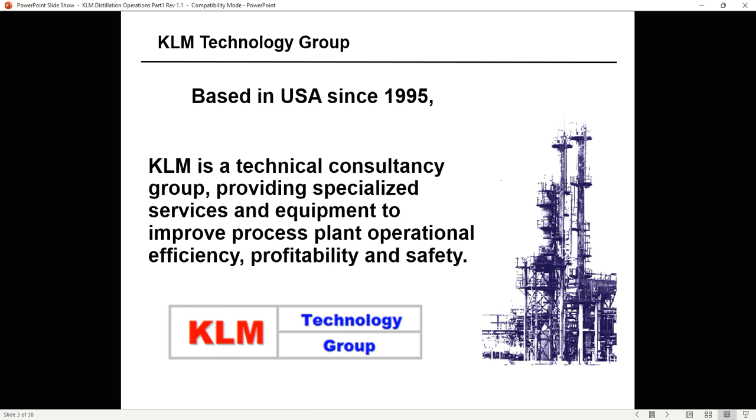Let me tell you a little bit about KLM Technology Group, based in the USA since 1995. KLM is a technical consultancy group providing specialized services and equipment to improve process plant operational efficiency, profitability, and safety.

KLM's core business is training. We do in-house training, regional conferences, and videos such as what we're doing today. We also provide engineering design guidelines, process engineering, optimization studies, energy studies, HAZOP facilitation, facility siting studies, and basic engineering with our key partners.

We do detailed design packages. We sell process equipment, random packing, structured packing. We have a great engineering magazine called Engineering Practice. We do unit commissioning and distillation equipment inspection.

It's very important for you to install the equipment correctly. We do unit benchmarking and evaluation of process units.

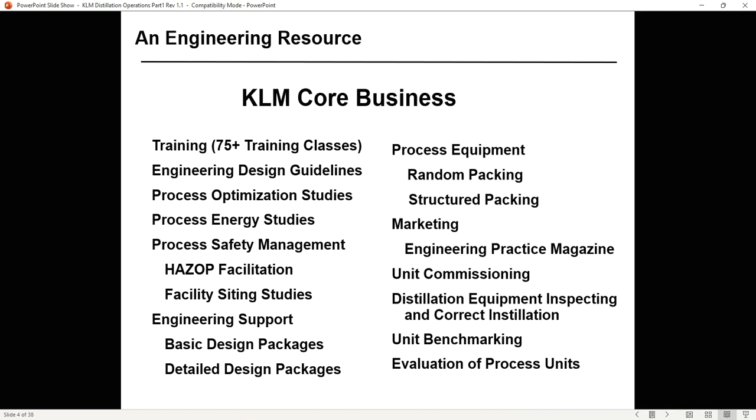Today we're discussing distillation for operations personnel. We also offer distillation design, operation, process control, and troubleshooting. For engineering and operations, we do advanced process simulation training, distillation for operations, which is what we're doing today, distillation commissioning, distillation process control, as well as other process unit and equipment groups.

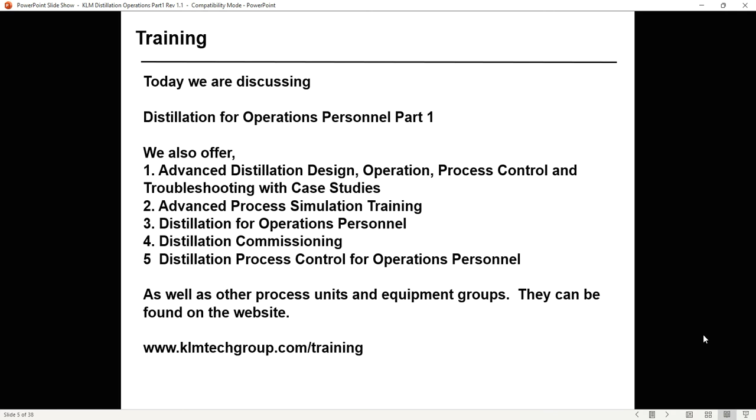We also do a whole group on ethylene, a large group on refining, and a large group on natural gas processing. These can be found on our website, klmtechgroup.com/training.

We have the Kolmetz Handbook of Process Equipment Design. In the Kolmetz Handbook, we have multiple chapters on distillation. We have distillation column sizing, 147 pages.

We have distillation tray hydraulics, which we'll talk about in part 2, 50 pages. Packing, reboiler design, process control, refinery crude towers, refinery vacuum towers, ethylene quench towers, BTX design, and 3 chapters on natural gas processing.

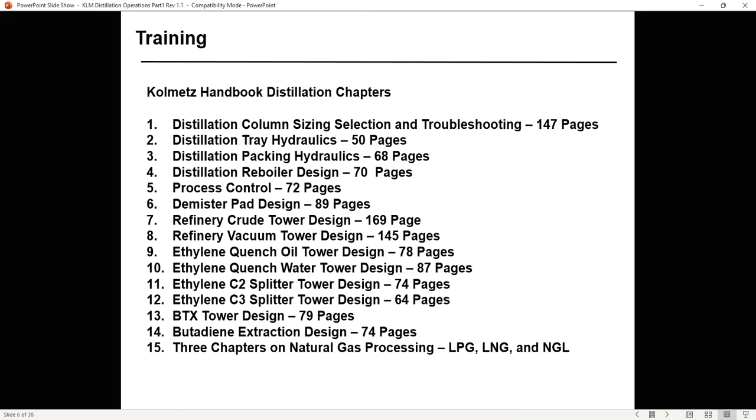There are multiple chapters on distillation in the Kolmetz Handbook. We have over 140 individual chapters on a wide range of subjects: pumps, compressors, control valves, relief valves. Each chapter is 80 to 120 pages, including design and sizing guidelines.

As we revise the chapters, we're adding troubleshooting sections. The handbook can be found here, klmtechgroup.com/Engineering-Design-Guidelines.htm.

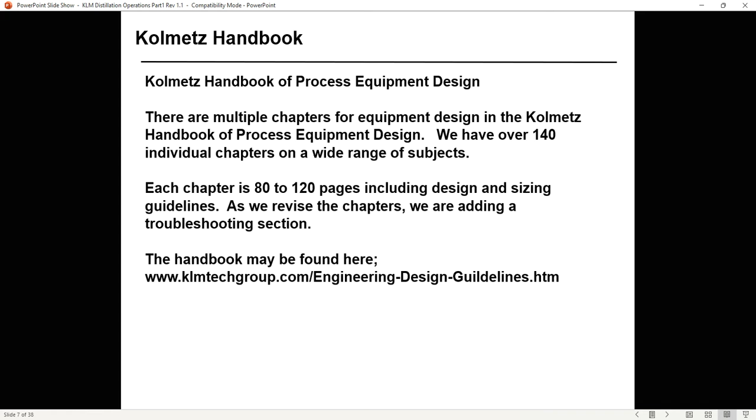Today we're discussing distillation for operations personnel. Part 1, which we're going to talk about today, is introduction, types of distillation, types of stages. Part 2 is types of trays, types of packing, and overview of hydraulics.

I think it's important for operations personnel to understand hydraulics. They need to understand flooding, weeping, and the internal flows inside a distillation column. I go a lot of places where they don't understand tower hydraulics.

They don't do the right process control. So it's important for operations personnel to understand how trays are designed, and then you can understand how to do proper process control.

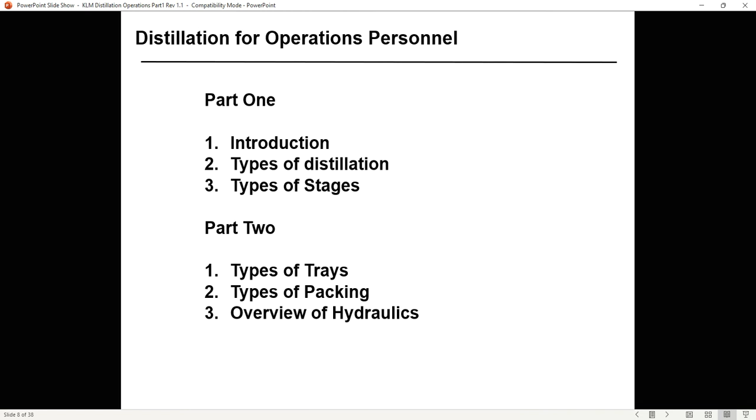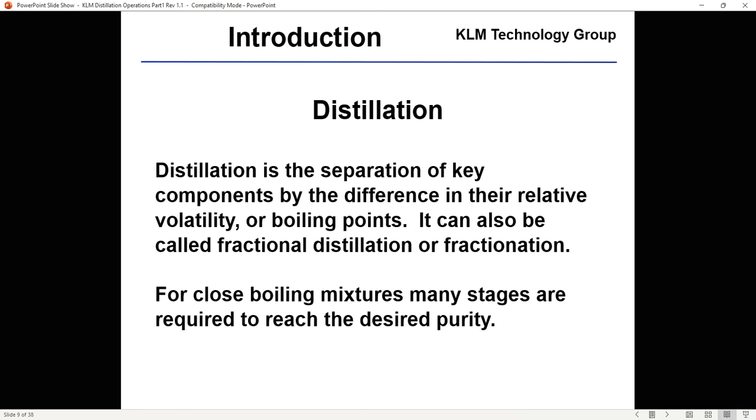Distillation is a separation of key components by the difference in the relative volatility or boiling points. So if their boiling points are close together, it's difficult to do by separation, by distillation. It can also be called fractional distillation or fractionation. For close boiling mixtures, many stages are required to reach the desired purity.

Distillation is favored over other separation techniques such as crystallization or membranes when the boiling points are far apart, when products are thermally stable, larger rates are desired, and no corrosion, precipitation, or explosion issues are present.

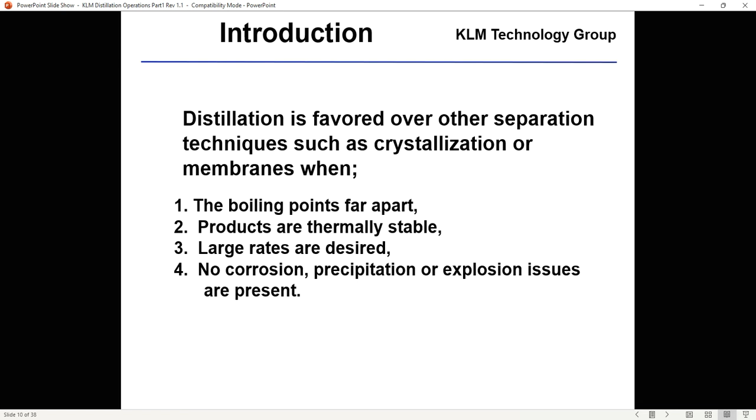Distillation is the most common separation technique, and it's energy intensive. In a refinery, distillation can consume more than 50% of the plant's operations energy cost.

The highest cost is typically the feed, and the second highest cost is the energy. If you understand distillation and how it is designed and should be controlled, you can save a significant amount of energy.

The correct equipment selection can improve your feedstock utilization, improve your recovery, and reduce your energy.

It's important that you don't just buy vanilla equipment. You need to buy equipment that has energy improvements and purity improvements.

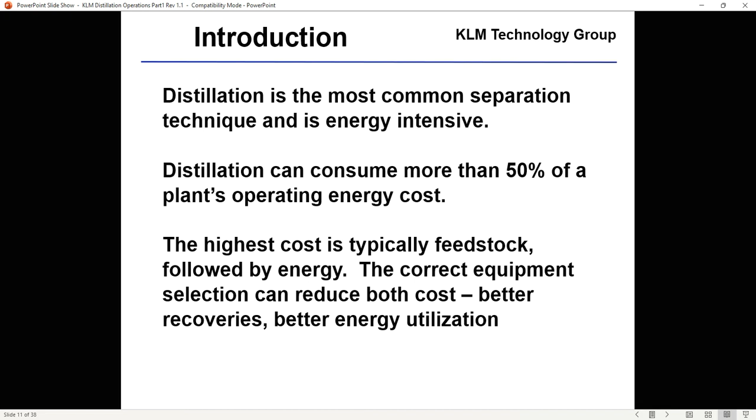One way to improve an existing plant's operating cost is to improve its efficiency and operations by process optimization and control. We can take an existing plant, typically go in and do a high-load test, and improve the efficiency and purity of most of the products.

But you can't really do that until you first understand distillation principles and design. So in the next two videos, we're going to talk about how to get better energy and better efficiency.

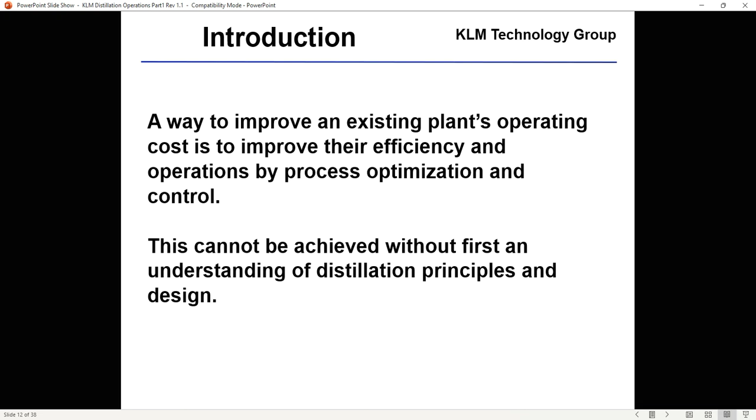There are two types of distillation columns in general: batch distillation and continuous distillation. And in continuous distillation, there are different types.

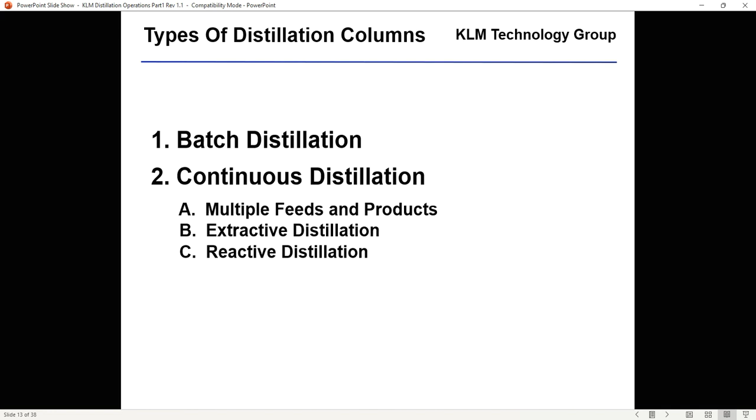Can be a single feed, can be multiple feeds and products. You've also got extractive distillation, where you add a solvent, and reactive distillation, where you add some catalyst in the column. Batch distillation - there are many types of distillation, each designed to perform specific types of separations, with different characteristics.

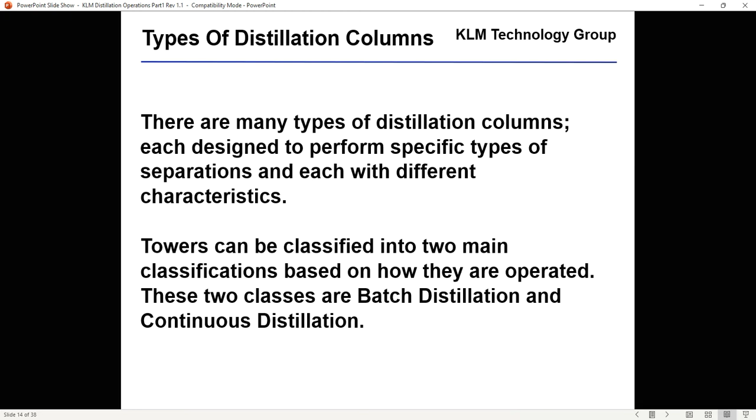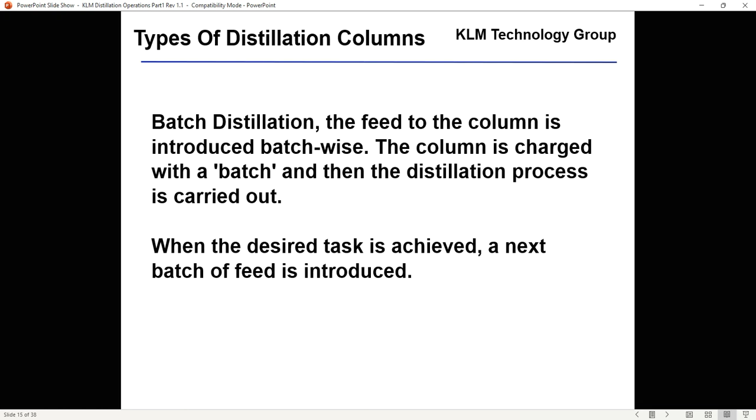They have two main classes: batch distillation and continuous distillation. In batch distillation, the feed to the column is introduced batch-wise. The column is charged with a batch, and the distillation is carried out. When the desired task is achieved, the next batch of feed is introduced. Typically batch distillation is for high value products in pharmaceuticals - you put a batch in there and try to recover all the expensive pharmaceuticals that you can.

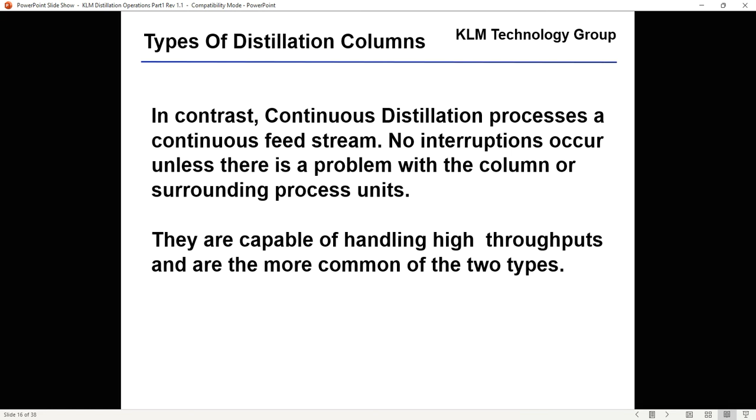In contrast, continuous distillation processes a continuous feed stream. No interruptions normally should occur unless there's a problem with the column or surrounding process units. They're capable of handling high throughputs, and they're the more common of the two types. So batch distillation is typically for high value products, used a lot in pharmaceuticals, while continuous distillation is used mostly in refineries and ethylene plants. If you have high throughputs, you're probably using continuous distillation.

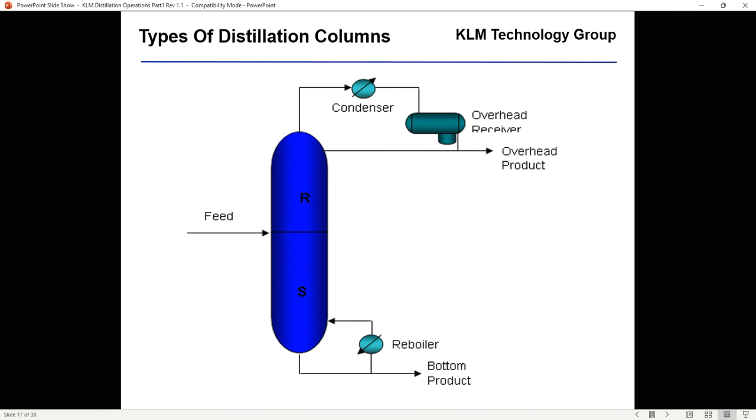Here's a picture of a continuous distillation column. I put the feed in. Above the feed is called the rectifying section. Below the feed is called the stripping section. I go overhead to the overhead condenser, the vapors are cooled, I go to the overhead receiver, and I put some back to the column as reflux. I make an overhead product. I go through the stripping section at the bottom, through the reboiler, and then out the bottom's product.

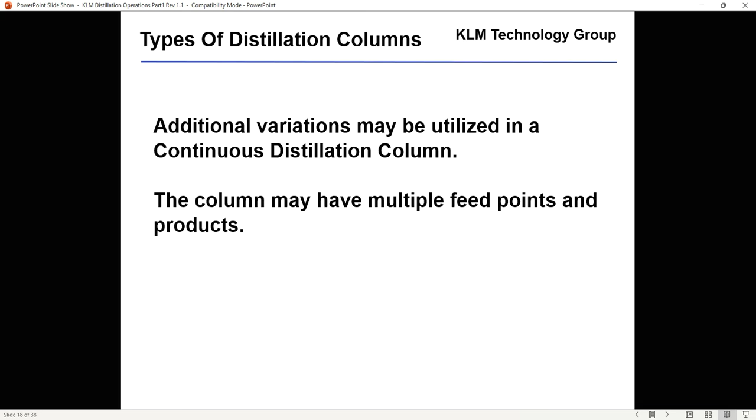Variations may be utilized in continuous distillation columns. The column may have multiple feed points and multiple products, like a crude column - it has one feed but multiple products. Some columns can have multiple feeds and multiple products.

The column may have a solvent added to the system to increase the separation. This type of column is called an extractive distillation column. The column may have a catalyst bed with a small reaction occurring in the column. This type is named a reactive distillation column.

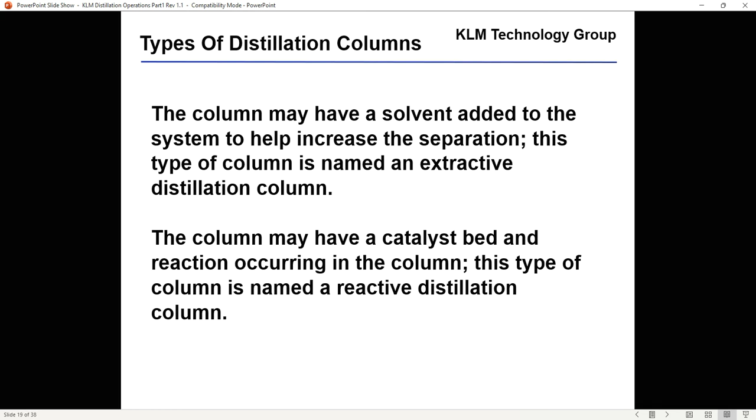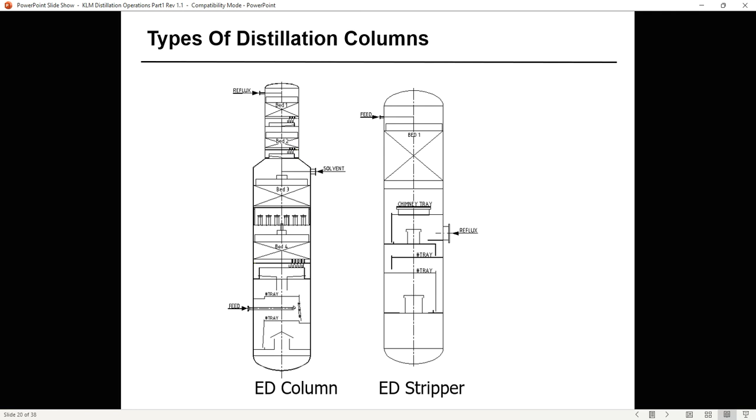This is a picture of an extractive distillation column. We have an article we wrote about this particular set of columns and trays. The solvent is added in the middle of the column and comes down the column. The feed is added near the bottom, and then the bottom of the column goes to the feed of the stripper. So this is called the extractive distillation column.

This is a reactive distillation column, where the tower feed comes in, you add some hydrogen, you may go through a catalyst zone, and you come up the overhead condenser, go to the overhead receiver, remove the hydrogen, and then make a net overhead. Then you have the bottoms. So this is a reactive distillation column.

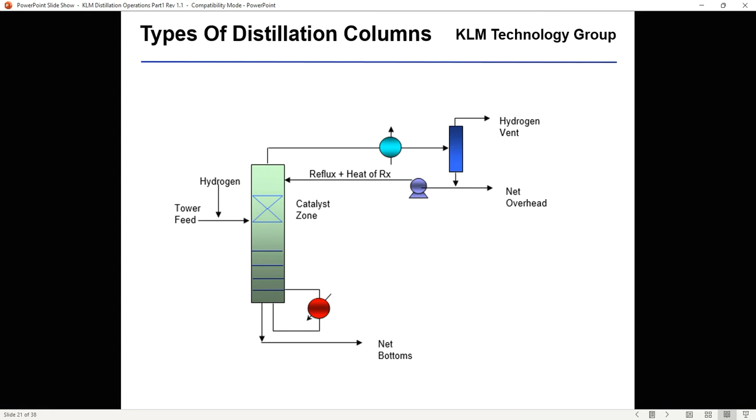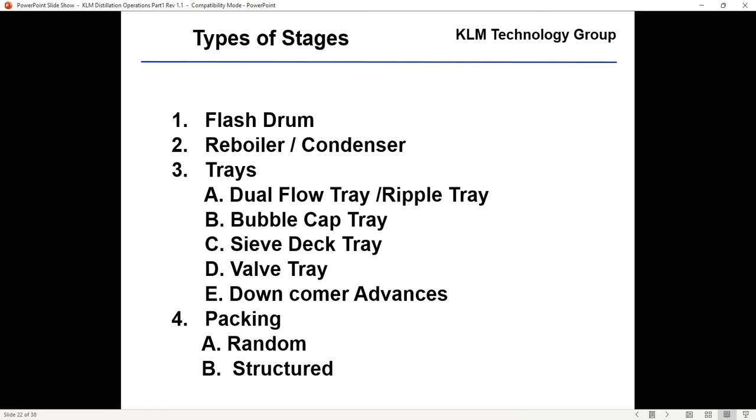So I've covered types of columns, and now types of stages. There are multiple types of stages. In part 2, we'll talk about different types of trays - dual flow tray, bubble cap tray, sieve deck, valve, and then random and structured packing. That's in part 2.

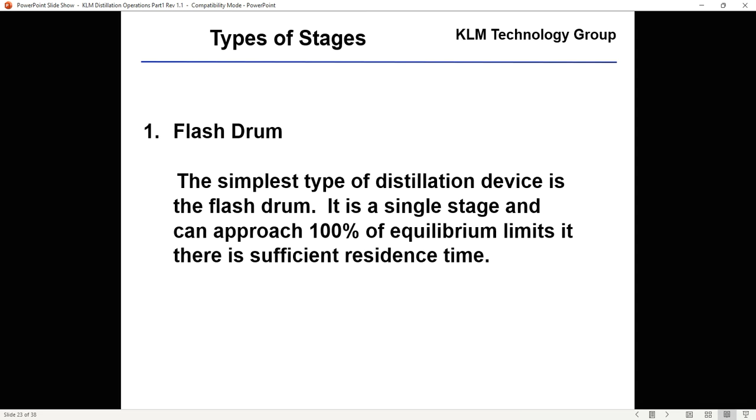Flash drum. The simplest type of distillation device is a flash drum. It's a single stage and can reach 100% of equilibrium limits if there's sufficient time. Typically you need about 5 minutes to reach equilibrium, and we call equilibrium 100% efficiency. Simple flash - an overhead receiver is an example of a flash drum.

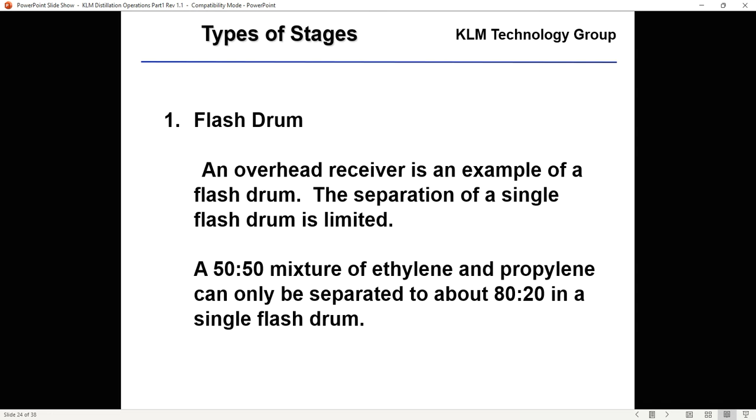A 50-50 mixture of ethylene and propylene can only be separated to about 80-20 in a single flash drum. Typically it looks like this - pretty straightforward. I come in, got overhead vapor, I've got overhead liquid. It's important for operations people to know that an overhead receiver is typically designed for 5 to 10 minutes of residence time.

So you need to understand that none of these vessels can have feed put in for very long without pulling feed out. There was a major incident at Texas City where they put feed into a column for multiple hours, and I don't think anybody there understood that an overhead receiver is designed for about 5 to 10 minutes residence time, and a reboiler in the bottom of the tower is designed for about 5 to 10 minutes residence time. An operations person needs to understand these vessels are not designed to hold hours and hours of fluid - they're designed to hold about 5 to 10 minutes of feed.

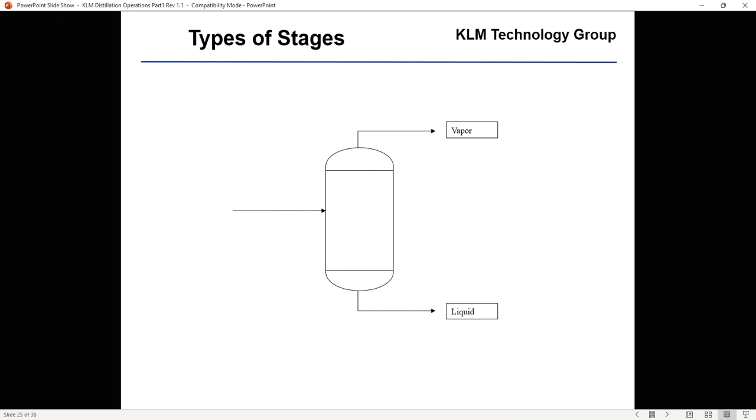Reboiler condenser. A reboiler is a flash drum with heat exchange. It can approach 100% of equilibrium limits if there's sufficient residence time. The 3 normal types of reboilers are horizontal thermosyphon, vertical thermosyphon, and kettle drums. The best design is for the liquid from the bottom tray to pass through the reboiler at least once before being drawn off as the tower bottoms.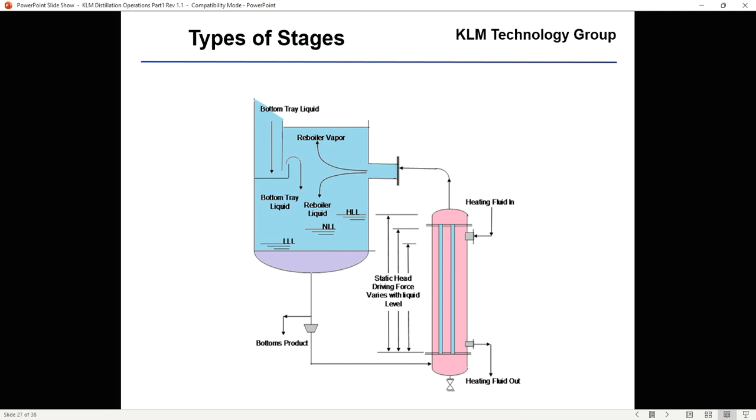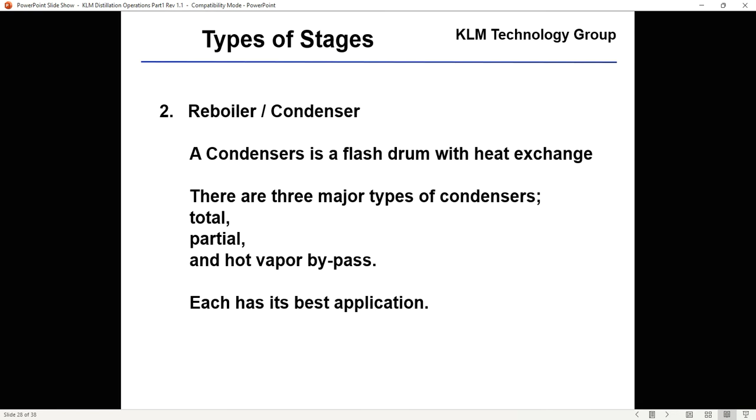Reboiler condensers - a condenser is a flash drum with heat exchange. There are 3 major types of condensers: total, partial, and hot vapor bypass. Each has its best application. So let's look at what these 3 types of overhead condensers look like.

A partial condenser is best when there's a large difference in the overhead vapor compositions. For example, when there's a small amount of methane and hydrogen mixed in a propylene stream, like in a propylene tower in an ethylene plant. The partial condenser condenses the propylene and leaves the methane and hydrogen as a vapor to be vented from the overhead receiver.

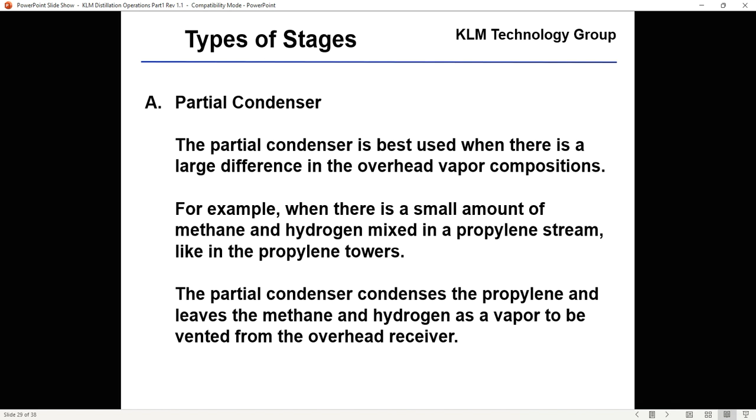This condenser works well for most applications. The system needs to be reviewed to address the potential buildup of non-condensable gases in the heat exchanger that can reduce the cooling potential of the exchanger.

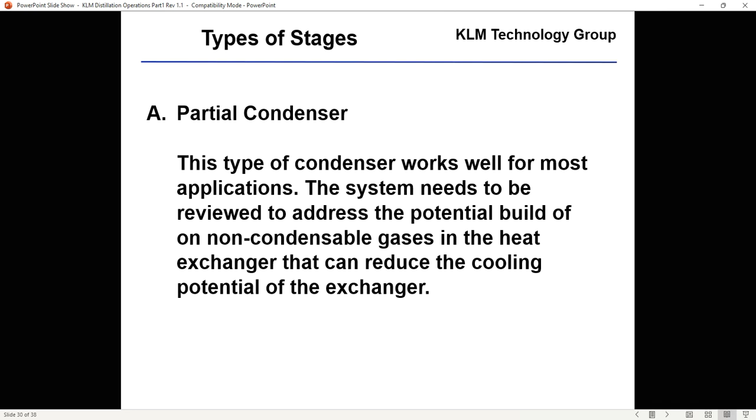And so what we want to do is crack that vent, the non-condensable vent, open. I don't want to waste a lot of product, but I want to crack it open till the line is just warm. And then what you'll notice is the temperature in the reflux will come down because I've got full area now to cool the reflux. As the reflux comes down, the tower starts to work better. I've got better equipment use.

So whenever I walk up to a system, I want to make sure this non-condensable vent is open. It's very important for operations personnel to understand what this non-condensable vent is for. I don't want to crack it wide open because I'm losing product, but I do want to crack it open till it's just warm.

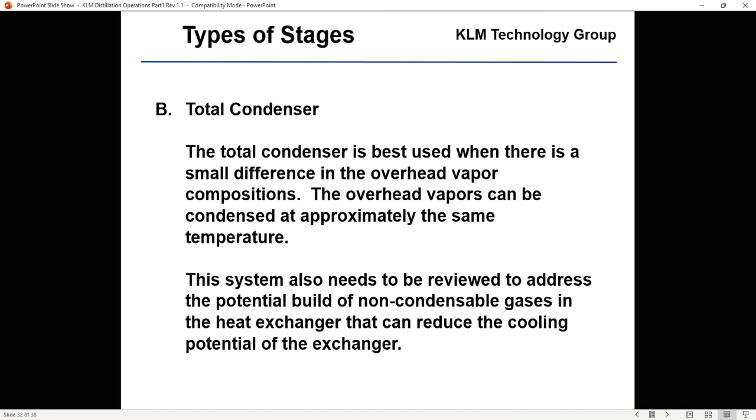So it's even more important that this vent be cracked open in a total condenser, because the light ends really don't have a way to leave. So you need to crack that non-condensable vent open, crack it open till it's warm.

Now, I've seen on a total condenser a significant improvement in the column operation when you crack that non-condensable vent open. So it's very important that if I'm going to do a high load test, this is one of the things I'm going to look for: is this vent cracked open?

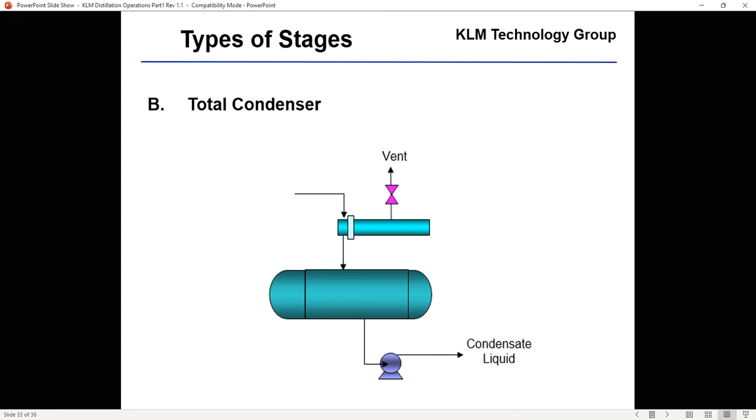Hot vapor bypass. The hot vapor bypass condenser is best utilized when there's potential for large changes of overhead vapor composition. The vapor bypass can be used to maintain the pressure in the tower system when the light components are lower than design.

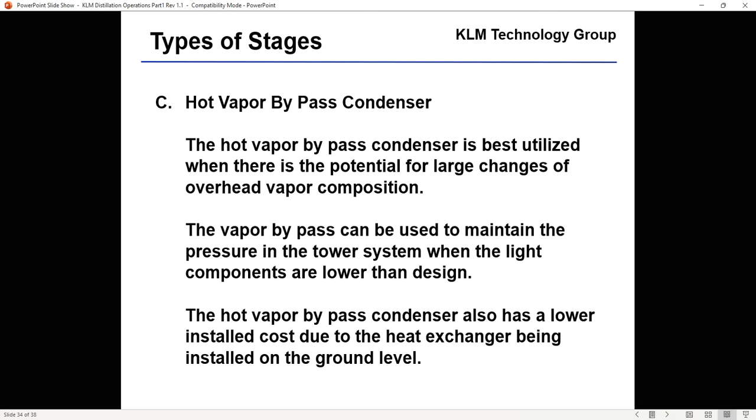The hot vapor bypass condenser also has a lower install cost due to the heat exchanger being installed on the ground. The negatives of the hot vapor bypass is that the bypass can be opened too much, increasing the temperature of the reflux. This reduces the tray efficiency in the top of the column, raises the tower pressure, which also makes the hydrocarbons harder to separate.

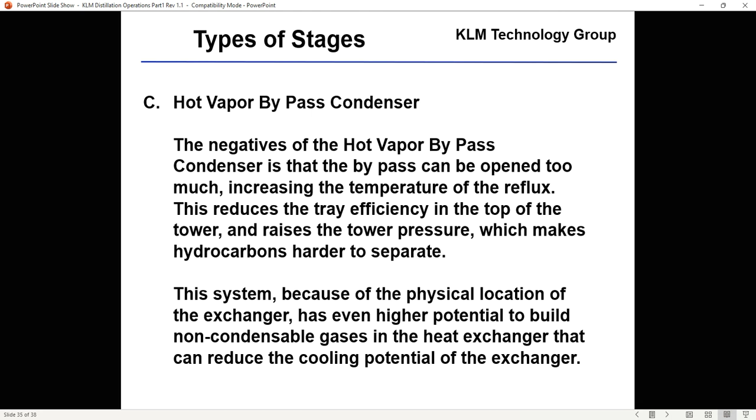So if the operations group opens this hot vapor bypass too much, I can significantly reduce the efficiency and the purity of the column. So I want to open that hot vapor bypass just enough to control the pressure. I don't want to open it too much. This system, because of the physical location of the heat exchanger, even has a higher potential to build up non-condensable gases in the heat exchanger that can reduce the cooling potential.

So on a hot vapor bypass, it comes off the tower. I've got the hot vapor bypass control valve, which is typically manually operated, so the operator can adjust it. I come down to the overhead condenser, which is on the ground, and it's even more important that I crack open this non-condensable vent for this system. Then the cooling goes back up to the overhead receiver, goes in and leaves.

Okay, these are typically designed for C4 columns, debutanizers. So I see a lot of this hot vapor bypass on a debutanizer type column. It's very important for operations to understand.

I don't want to crack this too much. I want to minimize the use of the hot vapor bypass because I want to push as much as possible through that condenser so the reflux will be cooler. Reflux is cooler, I get better stage efficiency, and I get better purity on my products. So it's important that operations groups understand the principles and how best to operate hot vapor bypass systems.

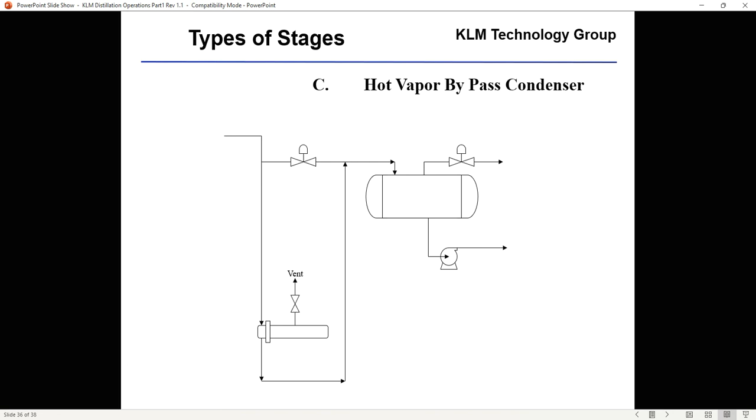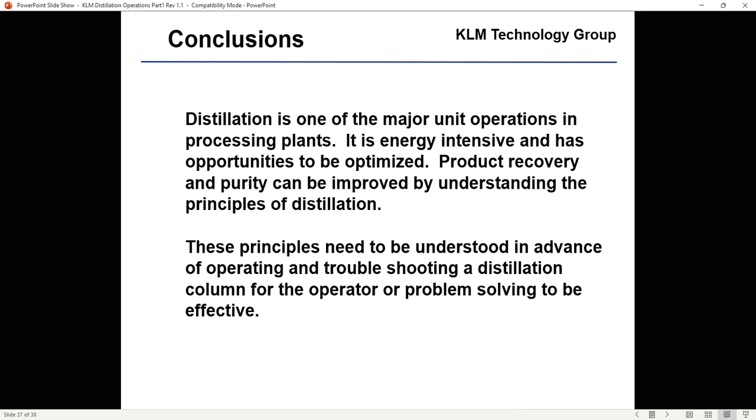Distillation, one of the major unit operations in processing plants, is energy intensive, but it has opportunities to be optimized. Product recovery and purity can be improved by understanding the principles of distillation. These principles need to be understood in advance of operating and troubleshooting a distillation column by the operator or problem solver to be effective. Thanks for your time.